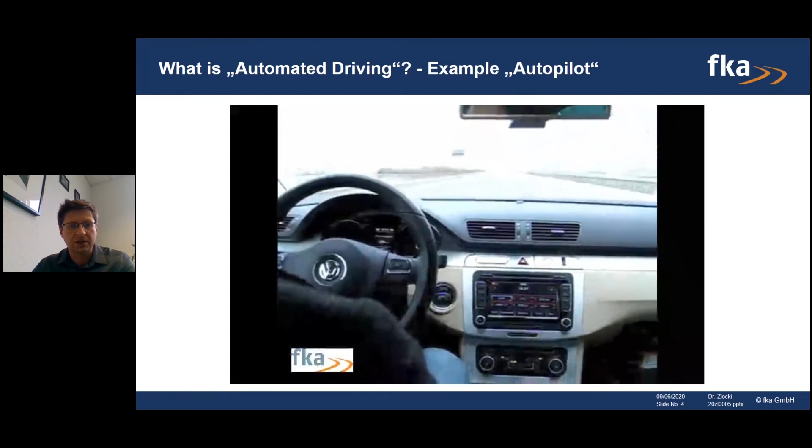And we were driving a level 2 function. I was still monitoring the environment, the traffic, as you can clearly see, but I didn't need to accelerate, decelerate, or steer the vehicle. So that is one form of automated driving.

Another form is here of my colleague Sebastian, who will give you the presentation next week. It's a valet parking system. So this is completely controlled by the function itself. The vehicle is driverless, in fact, so there's nobody in the vehicle. And the vehicle is able to find a parking space in the parking lot and park itself.

The third thing as a video is the so-called robo-taxi. So these are higher automation levels. We still operate it, of course, with a test driver. This is our test vehicle, the FKA vehicle, where here my colleague Benjamin is starting this drive, and you can see he just put the vehicle into gear, and the vehicle starts itself, it's steering itself.

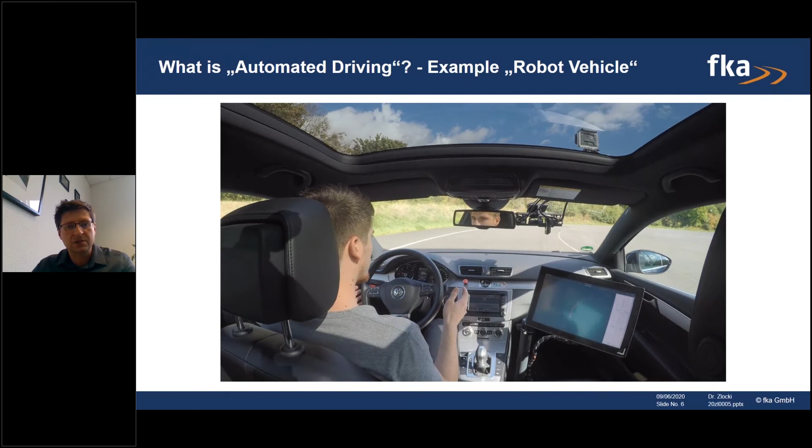He's a safety driver, of course, since we are still in the development phase, but basically the idea is that the vehicle can drive itself from A to B without any intervention of the driver, and maybe at some point even without the driver monitoring. But I will explain more in the next couple of slides.

So these are different forms of automated driving. As you can see, these are all ways of automated driving related to a vehicle. There are also other vehicles, not passenger vehicles, but maybe shuttles, so different forms of vehicles. I will give you some overview as well. Let's start with the history.

So automated driving is actually something which is going on since many years. There's a lot of media attention to automated driving coming up in the last couple of years, but we actually started at the end of the 80s, at the beginning of the 90s. So there was a European, large-scale project called Prometheus, in which the basic ideas were actually formulated and tried out the first time.

So what you can see here on the top left corner is a vehicle which was actually driven in automated mode with a level 2 system. Out of today's perspective, there were cameras installed in the vehicle, so the vehicle was able to perceive the environment using cameras and to steer itself on the motorway.

Then you might have heard about the DARPA challenges, the two grand challenges which took place in the desert, and the DARPA urban challenge, which took place in an airfield. I have some more slides on that, which were kind of milestones where actually the idea was born, especially later in the Silicon Valley area, to bring automated driving to the market.

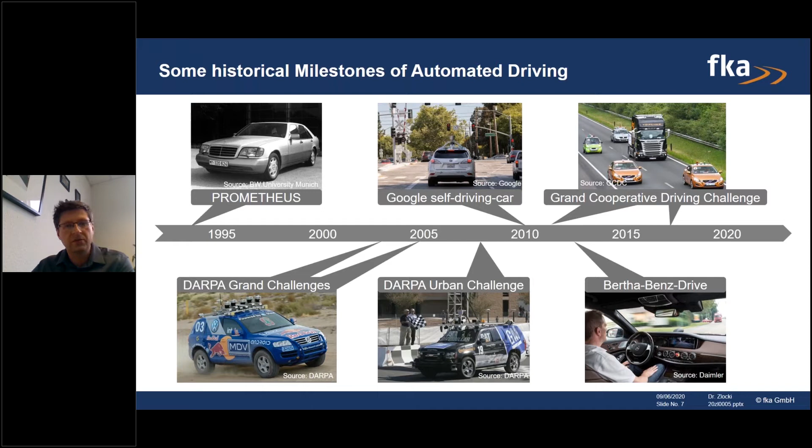In 2013, we had an event from a German manufacturer, from Daimler, the Bertha-Benz drive, which was also quite famous. And also in Europe, we had some challenges, the Grand Cooperative Driving Challenges, GCDC, which we had two, where the focus was more on connected automated driving. So these are some interesting milestones. There are a couple more.

Let's start with 2004, the first DARPA Grand Challenge. So the idea was to check how far vehicle automation was actually possible. And therefore, DARPA, the Defense Advanced Research Projects Agency, initiated a race through the desert where there was a prize of $1 million, and there were several teams who participated. Actually, there were quite many, but no one actually finished.

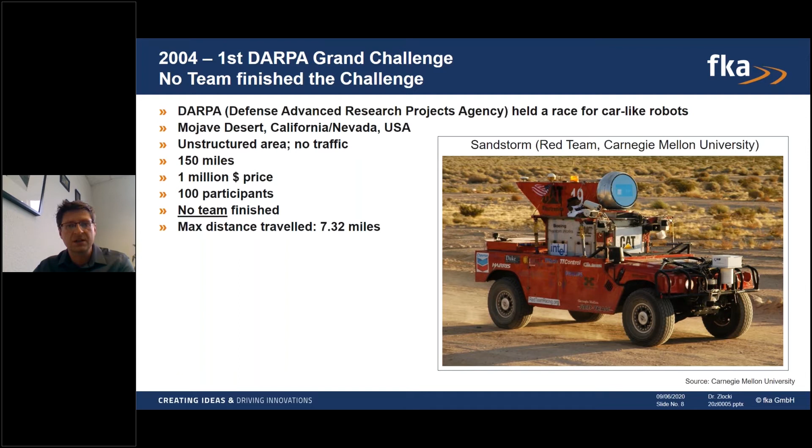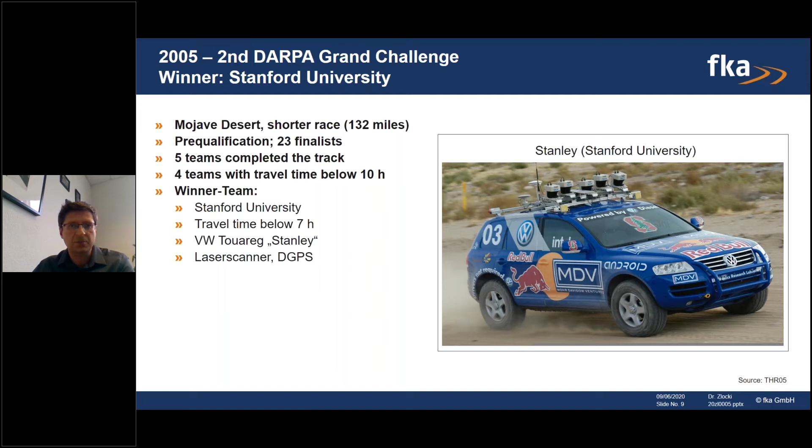So after a few miles, even the most advanced teams were running into problems, having crashes, breakdowns, and so on. So nobody could finish this race. And therefore, just 1 year later, DARPA initiated the second Grand Challenge. And here, actually, a couple of teams arrived at the finish line, which was a milestone already. And as you can see here, the Stanford vehicle, Stanley, won this race. So you can see already the sensor setup here on the vehicle, quite impressive for 2005.

2007, DARPA initiated the third challenge, which was in urban areas. Here, the vehicles had to fulfill some tasks like parking, U-turns, and in this area there were not only robot vehicles, but also stuntmen driving around trying to challenge those vehicles. For example, at intersections, trying to provoke accidents.

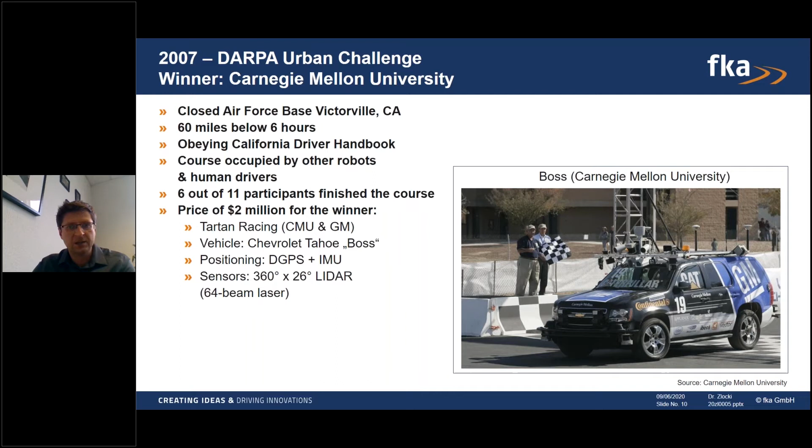And here, this vehicle called BOSS won the challenge. It was the Carnegie Mellon University, which was later the basis for the self-driving car program of Uber, which might be known today by you. So a lot of teams are still there, maybe wearing now a different hat, but the people are still working on this.

And as I said, in Germany, Daimler drove from Mannheim to Pforzheim in 2013 with an S-Class. The difference at Daimler was that they were not using so many sensors which were not production sensors. So they used, of course, a specially equipped vehicle with many sensors inside the vehicle, but most of the sensors were very close to production. So there was no laser scanner on top of the vehicle, but the vehicle was using sensors which were already in the market or very close to market start.

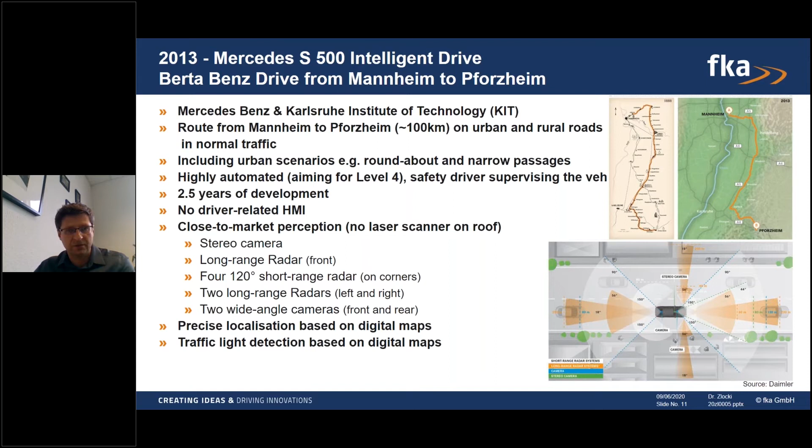So this was also kind of impressive because there were around 100 kilometers in Germany, urban and rural roads, which the vehicle could perform on with a safety driver on board, but without the intervention of the safety driver. And that was 2013. Yeah, so there are several milestones in history.

And when you look into mobility today, we see that mobility is changing. So we have these four important words, which you can spell CASE: connected, automated, shared, and electric. The overall automotive industry is working on this at the moment.

And you can see there might be a transfer from individually owned vehicles, which we have today, to what we have in the mobile phone world already, mobility as a service. So today we have connection as a service, so we are always connected. We have a kind of data volume in our phones, so we can surf the net, maybe a couple of gigabytes per month, which we can use.

And maybe we can think about this for mobility in the future as well, so that we have some kind of volume which we can use to travel from A to B, buy this at the beginning of the month, or we have some contract, and then we don't own any vehicles anymore, but we use those connected automated vehicles.

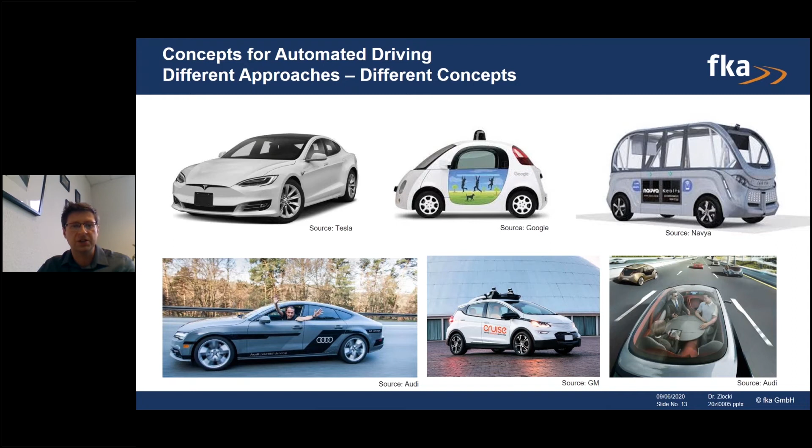But when we talk about automated driving, as I said at the beginning, we are not only talking about technical things. Automated driving is in everyday media, and you can even discuss it like soccer at the bar in the evening, and everybody has an opinion about this.

And we have tried to structure automated driving in different areas and different fields of action, and we came up with this so-called 5-level model, where we have, of course, a technical level, which for me as an engineer is, of course, the most important level. But you have also an interaction level, an economic level, a legal level, and a social level. In the following, I will go through some examples of these levels and analyze them a little bit deeper. So there are different research activities and different research questions on each of these levels.

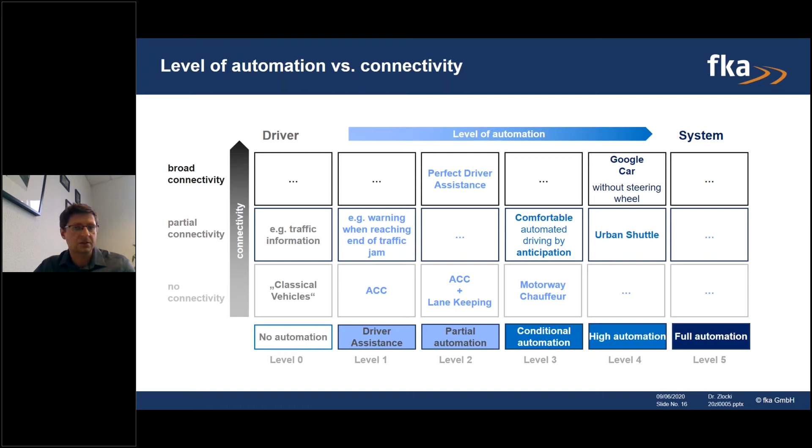Therefore, we can build this matrix, as you can see here, and this allows us to follow very interesting concepts of highly connected, highly automated vehicles. And as you can see, some examples here, some shuttles, some vehicles, some things which we have on the road already today. I think this is quite an interesting matrix. The components, what do we need for automated driving? I mentioned them already before.

It's sensing, having sensors on the vehicle, which usually are camera sensors, radar sensors, and LiDAR sensors, so optical sensors. We perceive the environment, we localize ourselves. We have very high definition maps on board, not the navigation maps, which you know from your navigation app or your navigation in your vehicle, but very high definition maps which have a lot of information on different layers, which we use to identify static objects like the road infrastructure, lane markings, maybe traffic signs, traffic lamps, and so on.

Based on this environment which we perceive, so the static objects and also the dynamic objects which are moving, pedestrians, other vehicles, trucks, buses, and so on, we then have environmental modeling, and based on that we can generate behavior of other traffic participants. So we understand how vehicles move. They move following vehicle models. We know those vehicle models. We can calculate them. Pedestrians can move a little bit more complicated, but there are also models available how pedestrians move. So we can also model pedestrians, and therefore we can generate the behavior.

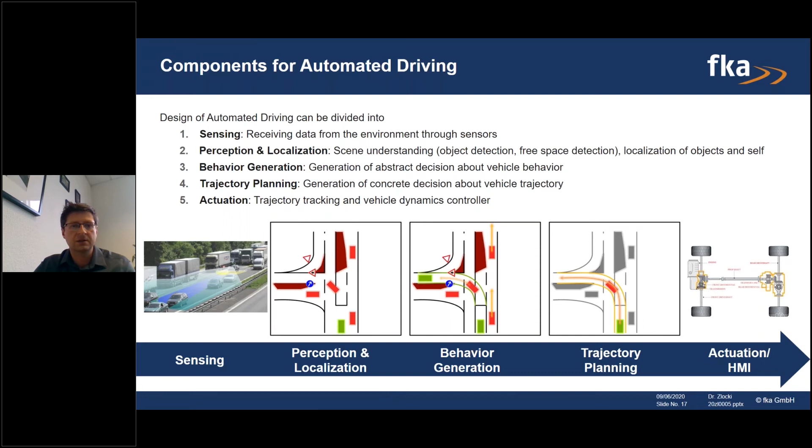This is a model which is also applicable to humans. With humans, we have skill-based, rule-based, and knowledge-based possibilities. And here the idea is that the vehicle has skill-based functions. You can compare this to ABS or ESP today. So these are functions which are available and get active in critical situations.

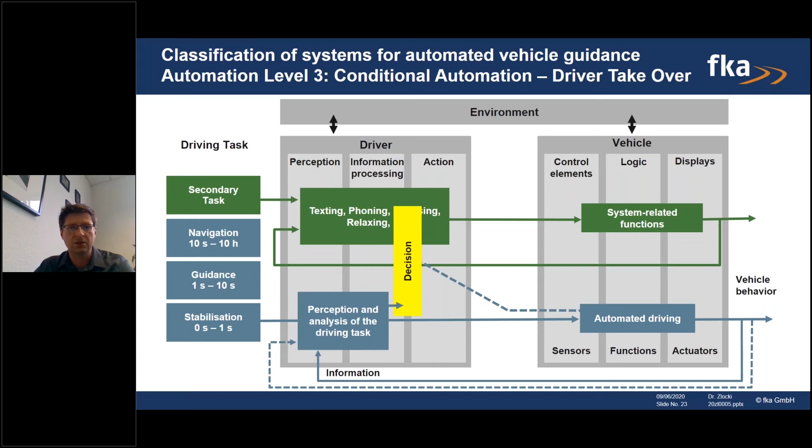On the next level, it's the economy level, so the economical level. At some point, of course, there's also invest to be taken, which is ongoing. So there's lots of research budget needed to progress here on the topic. You need to equip the vehicle with sensors, with ECUs, with the new architecture, which I showed you. So there's a lot of money involved, and of course, you need to also think about the business model.

So a fully equipped automated vehicle in level 4 automation might be quite expensive from today's perspective, since you have all these sensors and all this ECU on board. So you might think about different business models. As I showed before, mobility as a service might be a model, so that you actually don't own this vehicle. The vehicles are bought in fleets and they are rented out to persons, and they are constantly driving.

Not like the vehicles today, which are mostly in the garage or mostly in the parking space, like my vehicle. I'm here at work. During the time I'm working, the vehicle is standing, and I'm only using it like twice per day, more or less. So there might be a different business model behind it, and a change of mobility.

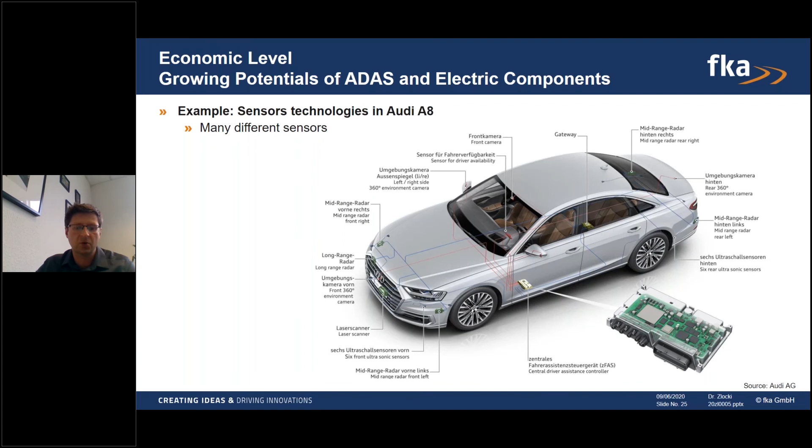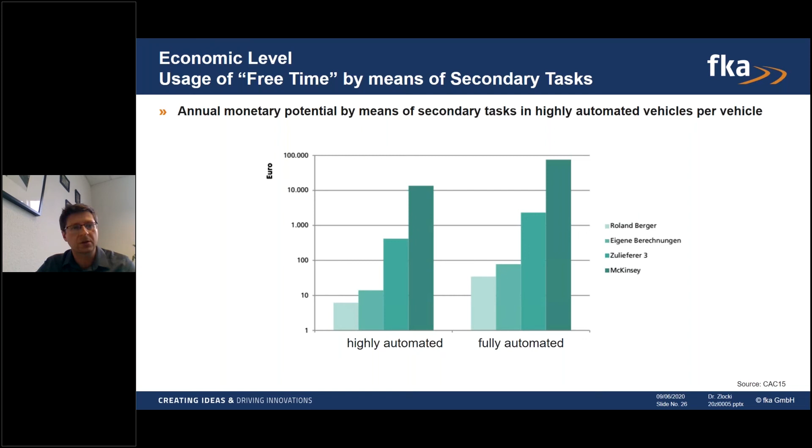And here's an example of some of these sensors and components in the vehicle. The examples from Audi. And you can see how the costs of those vehicles increase by having all these components on board. The good news is there's a lot of potential in this technology. So here's an analysis from different consulting companies, and you can see here that the annual monetary potential is seen by different consulting agencies quite high for different automation levels. Quite positive. So there might be an economic case which makes this whole thing quite interesting.

On the legal level, we need to talk about the laws first of all. Here to give you some example, there's especially in Germany or in Europe a law. It's the Vienna Convention. Not all the countries are part of the Vienna Convention, but many. And the Vienna Convention is valid since 1968. And actually, when you look at the Vienna Convention quite closely, and I don't want to read it to you, but you can look later into the slides, it was actually forbidden to use vehicle automation, because every driver shall at all times be able to control his vehicle or guide his animals. So that was 1968.

So in 2017, 1 year later, more or less, there was also a change in the laws of Germany on the 21st of June, where vehicle automation is kind of legal in Germany. It's still complicated, and we don't have level 3 vehicle automation on the road yet. But the law was adapted, and certification of level 3 systems is theoretically possible. Still, nobody really knows how to do that in detail. It's quite complicated, so it's not yet performed. But the law is adapted, and we have boundary conditions which make it possible to achieve level 3 vehicle automation.

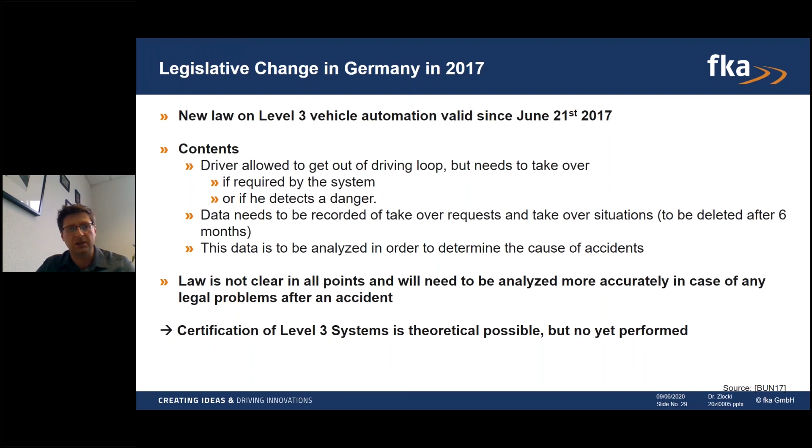Next to the legal level, there's also the social level. And I already talked about acceptance, but there are also on the social level ethics, which is a major topic. And one day prior to the change of the legislation, a report was issued by the Ethics Committee on automated and connected driving. And this is a document which is available in German and in English, so you can download it. And it's quite interesting. 14 experts created more or less 20 ethical rules on automated driving.

And it deals with this question: when you can't avoid a critical situation, should you rather go left where you have one person, or go right where you have a group of persons? How does the automated vehicle have to decide? But basically, in a nutshell, you can't. So the automated vehicle is not allowed to take ethical decisions where any kind of human life is involved.

So these kinds of decisions, one versus many, young versus old, and so on, all these ethical questions cannot be solved by the automated vehicle. So we are not allowed as engineers to program any of these decisions.

But the social level also asks, of course, about acceptance. And as I said at the beginning, what kind of benefit do we have with automated driving? What happens in case of accidents? The answer to this question is so-called impact assessment, which you need to perform for automated driving.

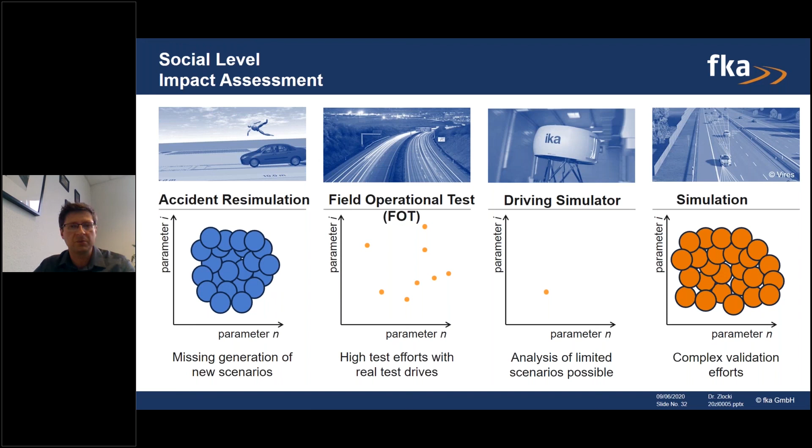There are different possibilities shown here, which are all not very good as a single possibility, but using a combination of these different possibilities, you can perform impact assessment, and that has been done in different projects. And I want to show you one result of one project, which was finished 2 years ago for the German BASt. Here you can see a simulation of traffic with and without automated driving.

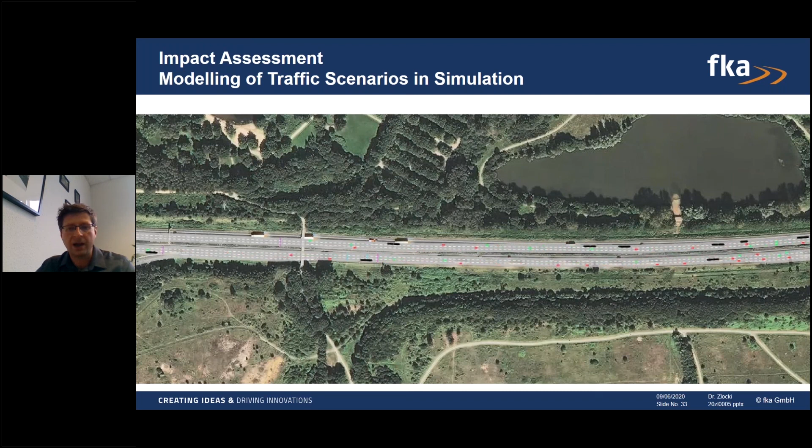You need to, of course, look into the boundary conditions. So what are the functional limits? We have looked here only at passenger vehicles, not at trucks, not at other traffic participants. So when you look at such studies, you need to understand the boundary conditions. But I think this is quite a nice analysis. And if you are interested, the report is available from BASt.